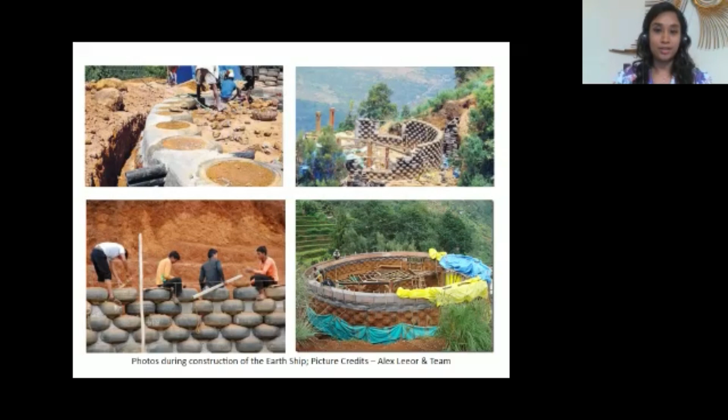I played a very small part in this building. Discarded tires, glass bottles, tins, cans were used to build the walls. I'd never come across anything like this before. This is where I learned and understood spatial planning, marking, leveling, few construction details, etc. This project helped me understand the nuances and the role of an architect in the real actual world.

Building with mud helped me appreciate an alternate style of life. Throwing balls of mud and kneading them into shape with your bare hands and feet, getting in close contact with earth, the mother material, and working in fresh air is a healthy activity for every individual in any sense.

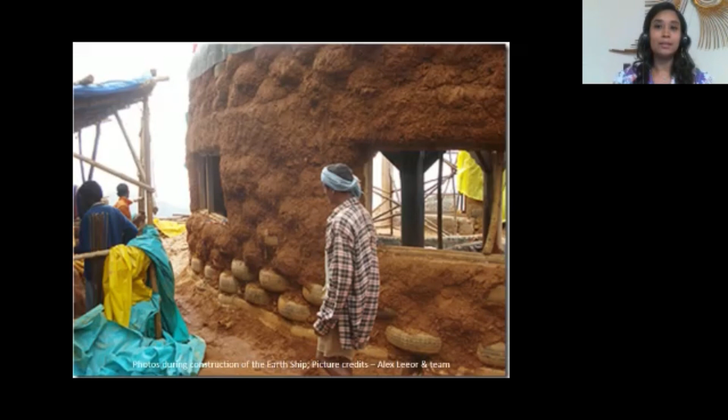This is definitely the polar opposite of a conventional RCC building. Because of the sculptural qualities, cob structures tend to be quirky, individualistic, organic and beautiful on their own. Sitting magnificently on top of these mountains, she breathes the air in the morning gloomy mist. This is a world of peace. It is also a world of hope. This is an earthship.

After the experience, I wanted to participate in more hands-on workshops. A friend of mine told me about Auroville, and this was my escape from university. Interaction with other designers, architects, interior designers, fashion designers, permaculturists, artists, environmentalists, and others was a completely new learning. These experiences unquestionably helped me get another point of view of life experiences to architecture and design.

Today, I will be showing you a project from Sacred Groves and the Bamboo Centre, Auroville. When I volunteered at Sacred Groves, I was working on a project that was designed to be a model of ecologically sensitive construction methods. The Sacred Groves project offers an alternative model of construction by reusing waste building rubble.

It was around the sites of Auroville and Pondicherry to construct houses made of earth concrete, a much less cement intensive building material. We recycled wood from packing crates and reused discarded petrol pump pipes for shuttering.

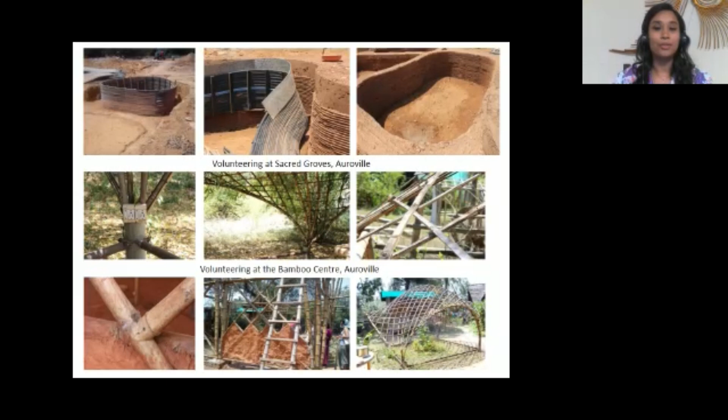The first project I want to showcase today is 682 Kutira. Kutira in Kannada means a simple building, often made of mud and wood. The project is located in suburban areas of Bangalore. The site measures 50 by 80 feet, with the shorter side facing the road along the southern edge.

The concept for the house was to try our level best not to add to the waste created by the construction industry, but to reuse discarded material. This would help reduce the carbon footprint. To achieve this, we made the bricks at site from the earth excavated for the foundation and the sump tank.

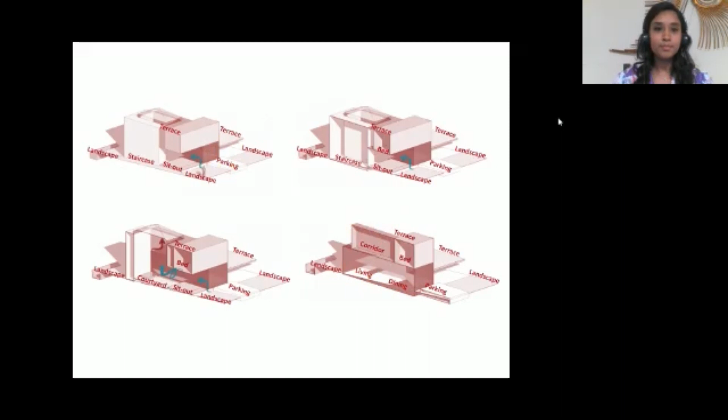The living space, with its large volume, is designed as a public node surrounded by built space on one side, garden and courtyard on the other. The east-west orientation of the living space welcomes the warm morning sun. The cooking, dining, and sleeping areas are aligned to the south and west of the site to protect the living area from direct sun.

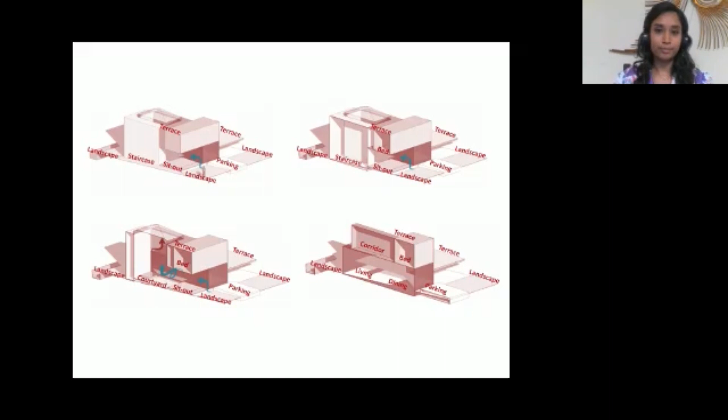The entry gateway to the house is a steel gate framed within steel columns. Both the steel columns and the steel gate were bought from another site where these materials were discarded as waste. On either side of the gate, the user is welcomed by two beautiful bougainvilleas. The gate for this house is a steel panel that was used to cover the generator set.

The house is also an attempt to create a level of privacy within the urban environment, where users could interact with each other and nature as playfully as possible. This would help them keep all the informal layers of life inside and take a pause from busy life.

The house is conceived as an introvert form, with a solid mass of brick that stands still and bold from the outside. The dynamic play of light and volumes is revealed only when you enter the house.

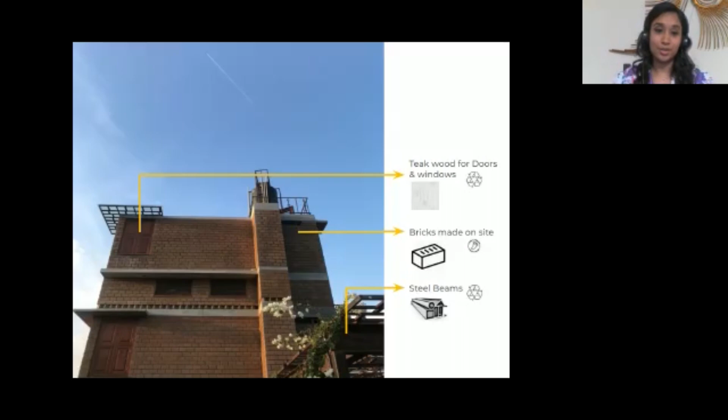The living area is designed considering the intuitive usage of space with inbuilt seating, going beyond the normative idea of formal living spaces. There are three types of seating: seating at the bay window, which is the formal seating; the L-shaped step down at the living, which becomes the informal seating space; and some loose furniture. The different types of fenestrations help enjoy the green space surrounding the living area, and smaller windows at the lintel level provide cross ventilation and light.

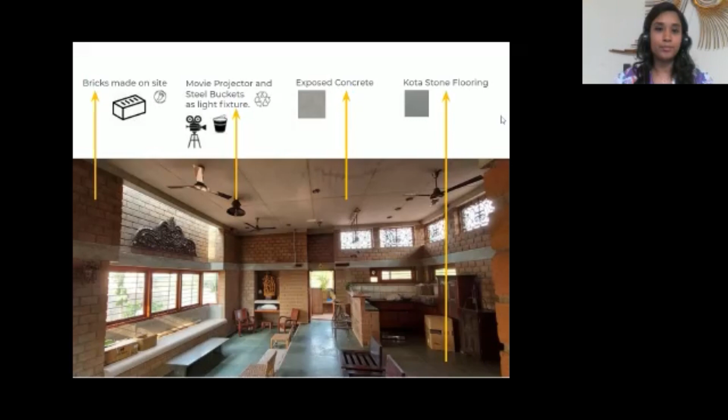The living area is very compact. The step down gives volume to the space. Introduction of skylights allows an adequate amount of sunlight into the space and helps the living space not look claustrophobic.

The house is designed to bring in a sense of intimacy and connection through subtle changes in the scale of various spaces. We looked at the material of modernity, reinforced concrete, forming the armature, along with traditional brick forming walls, defining the spaces and bringing a sense of warmth.

The house has become a celebration of imperfection of material substrate and the organic expression of asymmetry conspicuously present throughout, all adding to sensory dynamism. The house tastefully responded to the potential of its site and the aspirational requirements of the clients, delivering a restrained architectural product that is both visually capturing and functionally efficient, an organic addition to the local milieu.

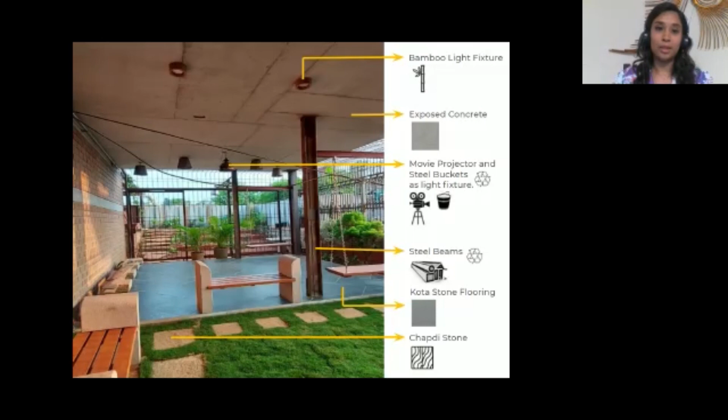The mezzanine terrace floor is designed to be a green space and also a spill-out space during parties. Instead of having a typical railing or parapet, the parapet was designed to be used as a seating space. The need for dichotomy of spatial constructs was explored as the core content of the house.

The house of blended pluralities explores spaces of traditional content entwined with features of a modern home. The spatial constructs interact and explore each other through the gardens.

I would then like to talk about my work in Bali. The world of bamboo in Bali is mesmerizing. Bamboo structures were swaying within the wind in perfect harmony with nature, and every time the structure swayed, they created a beautiful melody. Designing a bamboo structure challenges the existing paradigms of architecture and enables a future in which designs can be whole, beautiful, and sustainable. The versatility of bamboo is truly unparalleled.

The exploration and learning in bamboo begins the moment you touch and feel it. As I began making basic physical models, I realized bamboo cannot be forced to retain certain positions, like how we work with RCC or steel. Bamboo taught me to break the conventional paradigm architecture schools teach us. I had to dive deep to understand its subtle nuances and constraints. Unlike traditional methods, bamboo cannot just be straightened or cut arbitrarily to suit any design. The material fundamentally informs the design.

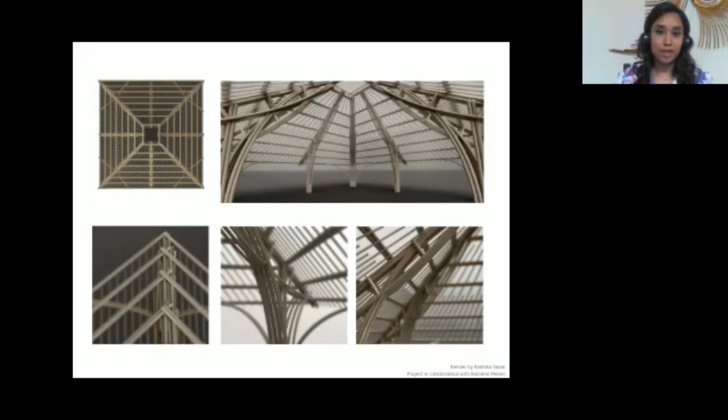The next project I want to talk about is the Roseate Beach Club in Goa. This is right now under construction, and we'll finish the construction by monsoon. It's bang at the beach in north Goa, and it's got a typical pyramidal roof. It's a post and beam structure where the columns are bent a little bit too because the span is quite a bit - a 45-meter by 45-meter square restaurant. The roofing is thatch, and we've used bamboo poles for columns and roof. We've used reclaimed wood for flooring, steel box sections for creating the plinth, and concrete as foundation.

So this is the construction images of the project currently. There are 8 columns and 7 are up, and we had to build the roof.

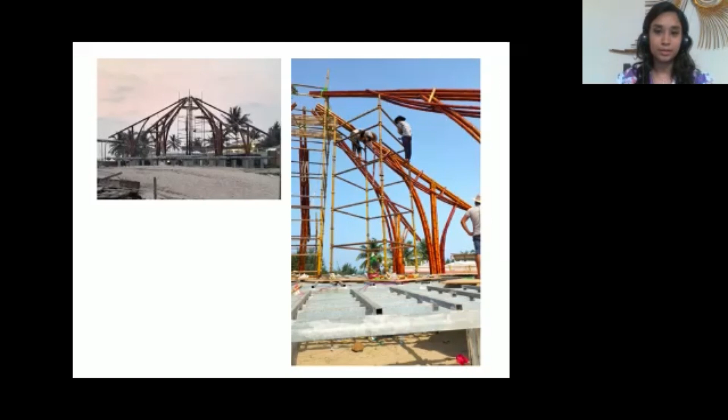I'd like to end my presentation saying, be like the bamboo - the higher you grow, the deeper you bow. Thank you.

Thank you, Nayanika. It was awesome to see how in the last 2 to 3 years you've addressed so many issues, and I think it's quite imperative that we start looking at products which are considered waste by the general industry to really be a part of our architectural vocabulary - that's one way we need to really address architecture. So we shall be taking some questions now.

One simple question for youngsters, Nayanika. What was the process of really going and exploring bamboo in Bali, and what triggered that idea, and what was the process you underwent to go and do a program there, so that if there are any youngsters who would like to go and do a program on bamboo, how do they go about it?

I was in Auroville Bamboo Center initially, and it was still new. Bamboo Center in Auroville started in 2009, and I was there from 2010 to 2013. Not a lot of experiments, but bamboo as a material made me feel very curious, and I wanted to learn a lot more. I came across Green School when I was doing my research, and they also have bamboo workshops, so that's where I went and did my course, and I also continued to work with them for a while.